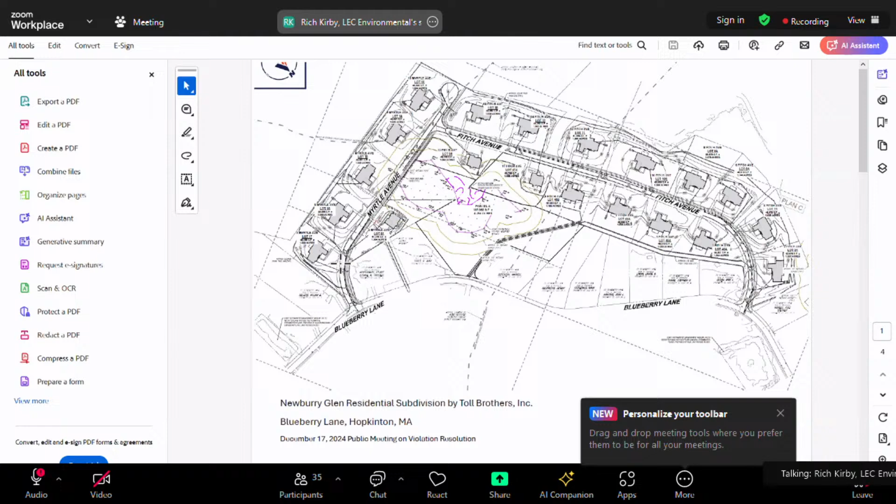The notice of violation, again, was dated December 13th, and it goes through some observations made by a commission member, namely sedimentation onto Fitch Avenue, the interior subdivision roadway, which made its way onto Blueberry Lane into the stormwater infrastructure and through down-gradient stormwater basins.

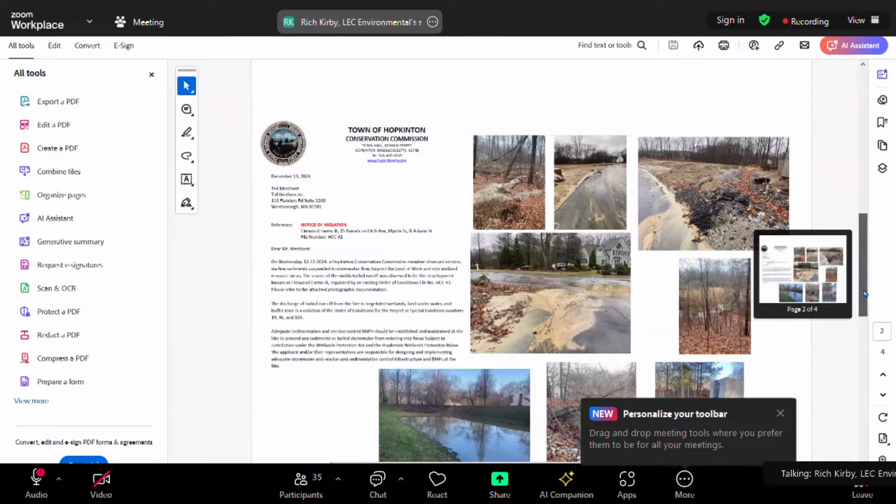Since then, Toll Brothers, Ted Merchant, myself, and the contractor from Fenton and Son met on site today, this afternoon, as soon as I heard about this, and got out to the site. Cleanup efforts have been underway.

Sediment was removed from Fitch Avenue and Blueberry Lane, and the contractor swept the pavement. The catch basin inlet protection was replaced and cleaned out along Fitch Avenue and Blueberry Lane. Basically they did their best to clean it up. You can see this bottom photo here - the pavement's pretty clean at this point. This catch basin, which is really the low point that received the lion's share of sediment, has all been replaced and cleaned out, and all the sediment around it has been cleaned out.

So we put our heads together and talked about what we could do as soon as possible. Ted made some calls and called in some favors, and fortunately we're able to get on this right away. S&M Farms is going to be installing compost sock and silt fence along roughly the northern half of both sides of Fitch Avenue. That's happening tomorrow. The whole point of that is to really limit the sediment transport from the open areas of the site onto the pavement, where it will then be directed to these catch basins.

We're going to reestablish a stormwater diversion swale with check dams and direct more surface runoff to the temporary basin as it was intended. Additional catch basin inlet protection along Blueberry Lane.

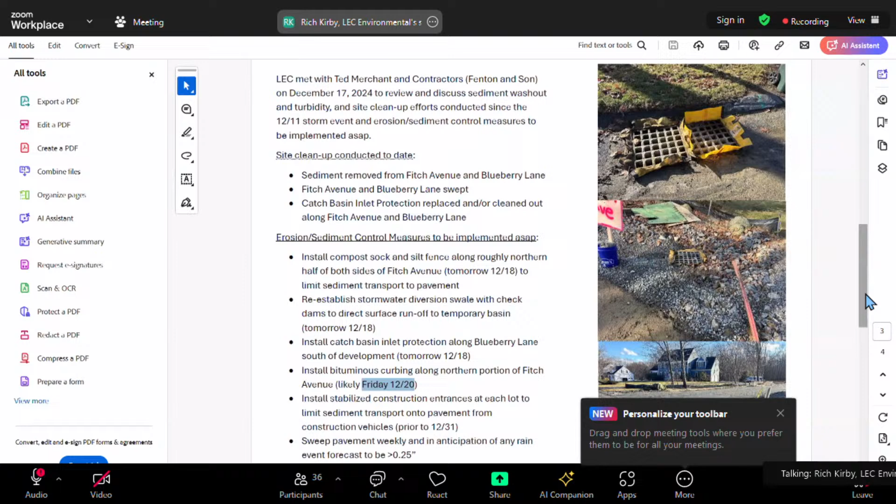So this fourth page includes a sketch of what we intend to do, starting tomorrow through the end of this week and the end of the year.

While the lion's share of the issue was down here at the northern end, we were told that there was some sedimentation observed at this end of Blueberry Lane as well. There is a down gradient catch basin that currently does not have protection, so we're going to install inlet protection here.

This is a note indicating the street sweeping, which will occur on a weekly basis, and of course, before a rain event greater than a quarter inch within 24 hours. These green lines represent where we're going to install the compost sock and entrenched silt fence on either side of Fitch Avenue. And we'll, of course, have stabilized construction entrances for each lot.

Ultimately, the goal is to have the siltation fence and compost sock block off entrances to the properties with the exception of the construction entrance, so vehicles are forced to utilize that stabilized construction entrance to limit sediment tracking onto the street.

We're also going to reestablish this temporary diversion swale, which will direct water to this existing temporary basin. As commission members may be aware, there's already a gravel swale along the perimeter of the property that flows into this catch basin right here at this corner. And then there's another perimeter drain installed over on this side and over here as well, I believe.

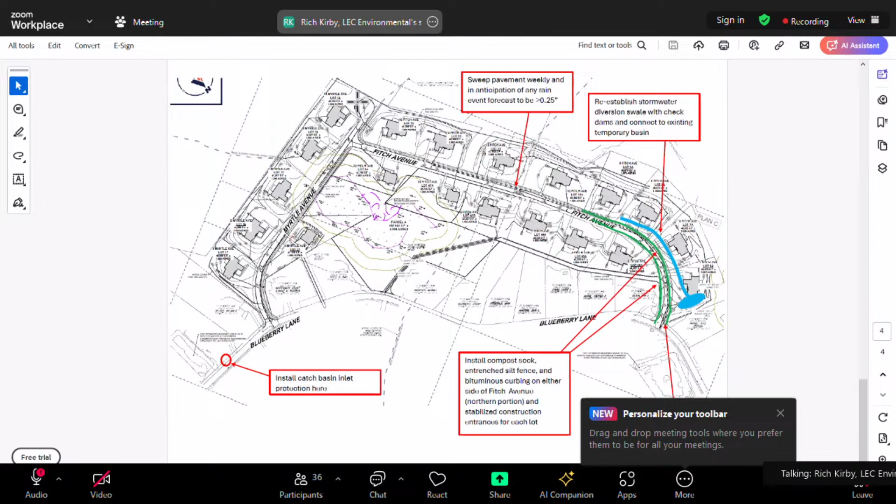So a good portion of the site has been cleared and grubbed as they anticipate rough grading and getting the foundations in. There are portions of the site, and Ted, correct me if I'm wrong, that have been cleared of vegetation but haven't been grubbed yet. So there's still sort of the ground cover duff in place to minimize runoff from those areas.

Yeah, that was going to be my point, Rich. The first 6 lots, as we come in, we have started to grade, and I think a lot of the pictures you saw reflected those 6 lots. But as you get further into the site, past the green line that's there, we haven't stripped the majority of that area outside of the right of way.

And I think the runoff in general from those areas is pretty minimal. For that reason, we've started construction, or started digging the first foundation on the first 6, and plan to start the remaining 5 here very shortly. So that's why those guys are cleared.

But the remaining ones, we haven't started full earthwork yet. And the goal is that once we get them temporarily graded, stripped and temporarily graded, there would be seed and straw placed down on them until such a time as we started construction on the home itself.

And so I would— oh, go ahead, Ted, sorry. For how long has there been just exposed dirt waiting for the foundations to go in? Has it been a week? Has it been a month?

They've been actively being worked on for, it's been a while off and on. I couldn't put a time frame on it, but they were on them less than 2 weeks ago, grading them up. I think it's just been lucky dry, so it hasn't been an issue. I would agree with that as well.

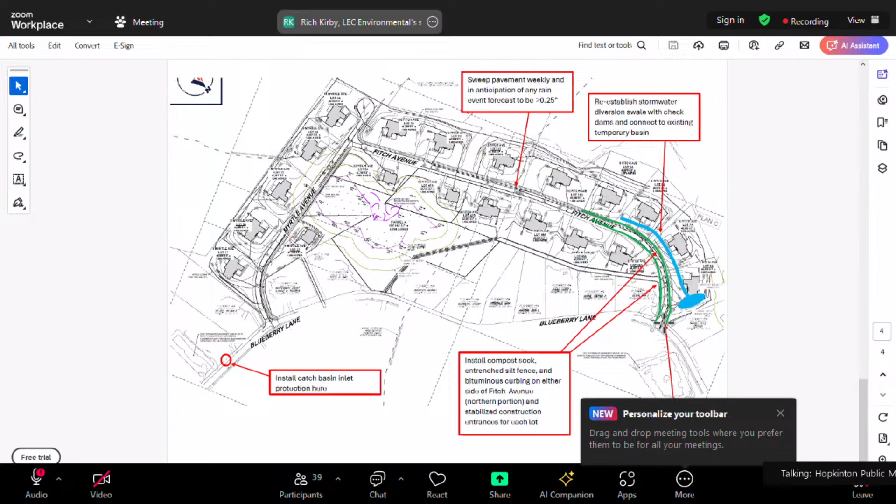Does anyone else on the commission have any questions, comments, or anyone from the public? Just looking for hands.

So at this point in time, I think it sounds like you have a good plan. If you could check in with Bowler, get those calcs, and just keep Judy and Anna updated on your work as it progresses over the next couple days so they can check it out. And Joe, that'd be great. I think that's all we need, unless I'm missing anything, Anna or Judy.

I think I feel comfortable with the response here at this point in time. Okay, we appreciate that, thank you, and we'll continue to keep you posted. Okay, thank you. All right. Thanks, have a good night. You too.

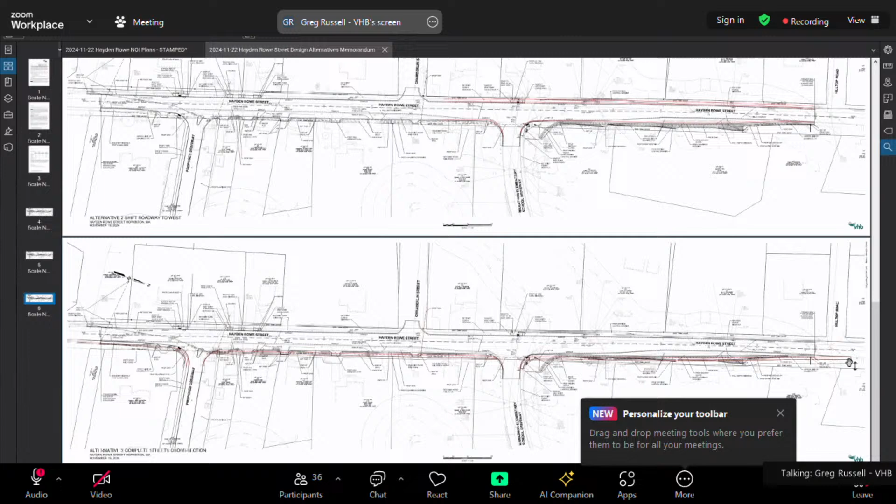As you can see in the red line here, this red line would be the curb line. So our curb line is the proposed curb line. It's about an extra 5 to 6 feet, so then we're entering direct wetland impacts, and again, rebuilding the head wall that's on the east side of the stream.

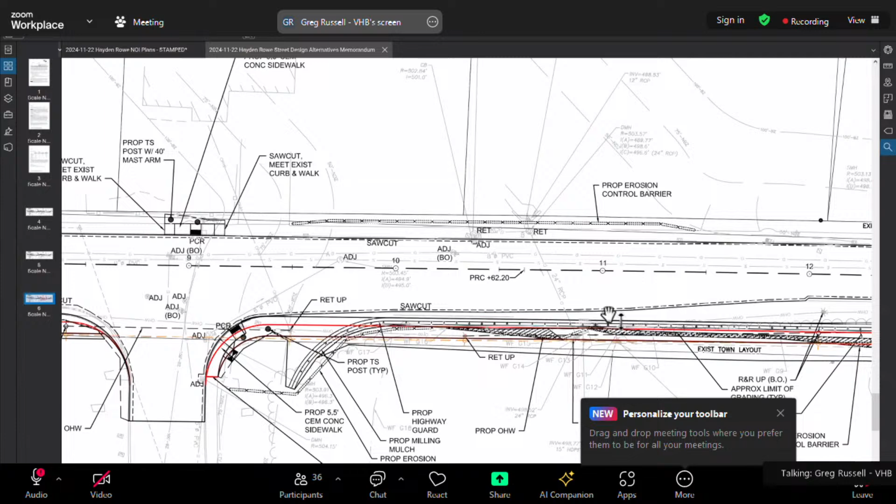Taking all those into consideration, we felt the initial alternative that we looked at provided the least amount of impacts to the wetland resource areas without opening up other issues that wouldn't be present otherwise. So with that, we moved forward with that alternative.

As Claire said, the project starts just to the south of the proposed Charleswood driveway and carries through, starts to widen out. The sidewalk coming out of the Charleswood School ties in and we provide a pedestrian crossing at the mouth, and then provide some widening to maintain that left turn lane and additional shoulder width moving up.

All this area is outside of any of the buffer zones. Then we come back, and tie into existing as we approach the Marathon School driveway. As we go through the driveway, we start getting into the buffer zones. There's no widening proposed other than for shoulders, for the first 100 feet or so.

Basically, because we're maintaining the existing cross section. Then we start to carry the left turn lane further to the north, which results in the additional widening along with the shoulders. In addition to that, we're providing guardrail along the east side until we start to taper back into the existing to the north by Hilltop.

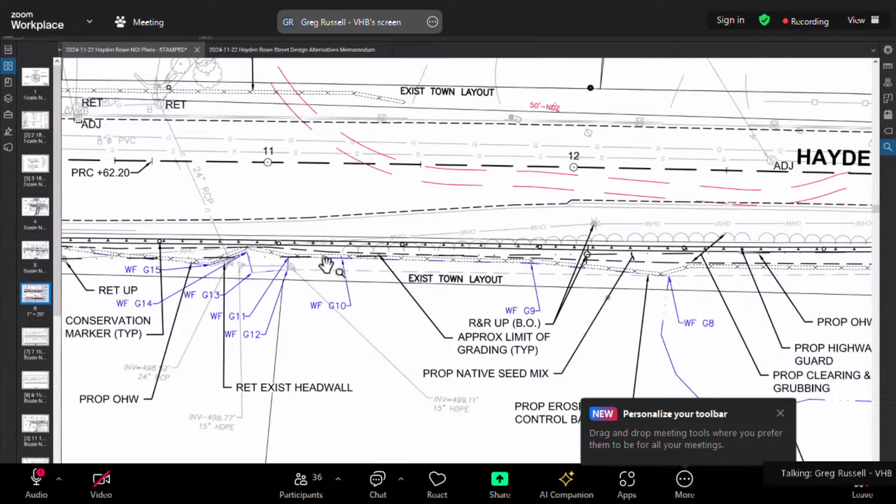So you can see here we have the limit of grading in this dark dashed line. Here's the culvert that we were discussing, so we're staying away from that. We provided conservation markers at regular intervals along the guardrail.

There are 2 utility poles that are getting moved back in the widening. The first 2 closest to the Marathon School driveway are staying in place. So then the widening continues. We extend the left turn lane approximately 250 feet to the north, and then it starts to taper back in.

This area here is the area with the knotweed that we're looking at. So most of the knotweed, or a good percentage of it, is going to be taken out as part of the widening, and that area will then be under a paved surface.

From grading, we have no direct impacts to the wetland area of the bordering vegetated wetland. We are putting in compost filter tubes along the entire limit of grading, or we've shown them here along the edge of the wetland, just so that we have space to remove additional knotweed and do the planting and seeding that Claire had mentioned.

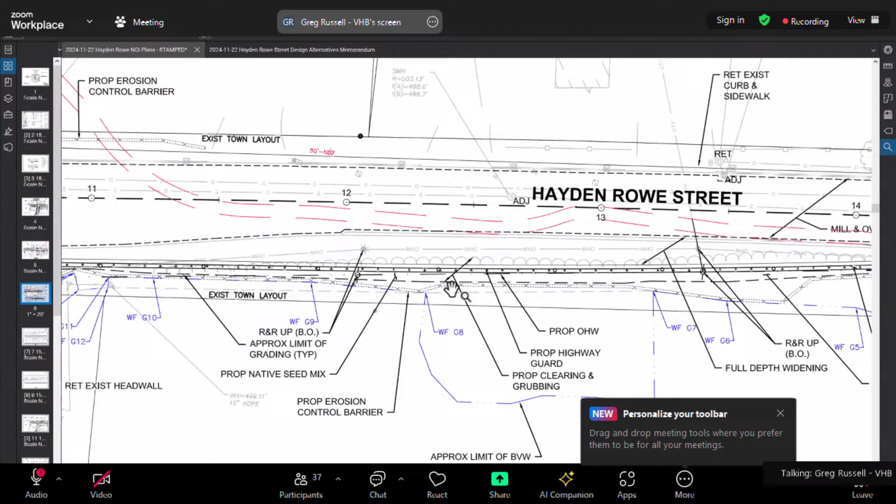That area will be graded down. We're not proposing - currently this whole area on the east side drains as country drainage. There's a bit of intermittent berm on that side which ends right around here, and then it just goes into straight country drainage and drains off the side directly into the wetland. So the intent is to maintain that flow pattern. However, it'll all just sheet flow off the edge.

We'll be replanting the slope, and wherever we take out the knotweed, we'll be putting in shrubs along with the native seed mix.

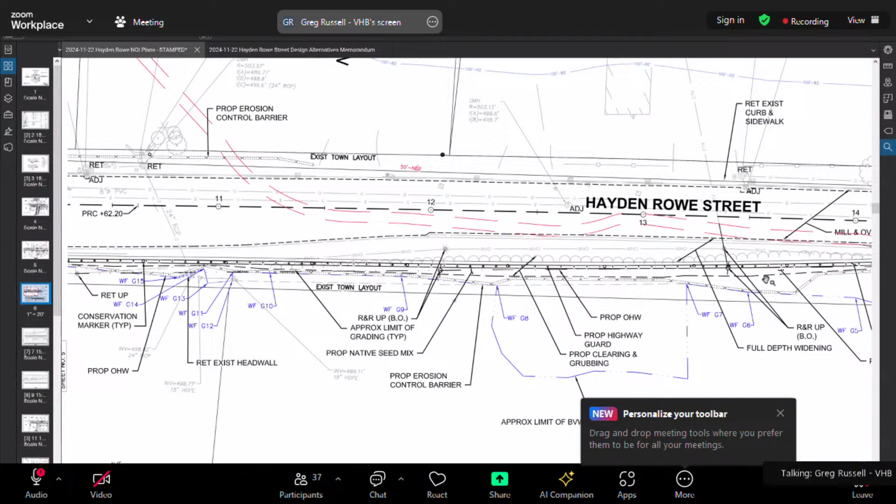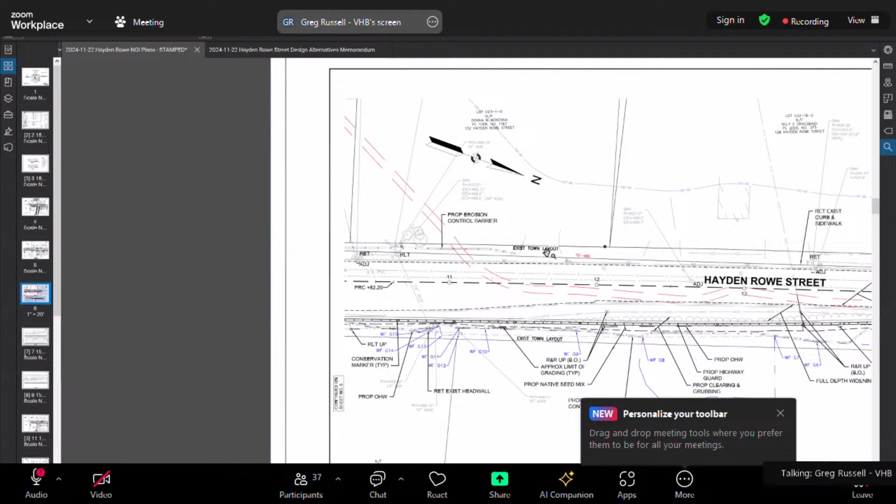The west side is all granite curb with concrete sidewalk. We're not proposing any work on that side within the buffer zone. We have put erosion controls starting within the public right of way, along the back of the existing head wall, which basically go from the first driveway to the north to the first driveway to the south, just to make sure that nothing from the roadway construction gets passed into that section of the river.

The intent is for the widening area to be full depth reconstruction. The rest of it will be mill and overlay. So there should be minimal modifications, either elevation wise or construction wise on the west side. So we've kept the erosion control to that limited area.

Down on this side, on the east side, we start the erosion control basically at the first catch basin down the Marathon driveway, and then carry it all along for the rest of the project limits.

Stormwater wise, there is an existing stormwater treatment unit on the Marathon driveway that discharges into a detention basin over on the north side of the driveway. There's a high point right around in this general area that kind of separates the north and south parts of the project. So pretty much all of this drainage either goes to this area which is crowned, so it either goes to the west and flows along the curb, or it comes down and gets into this catch basin and goes down. Anything to the north again flows directly into the wetland.

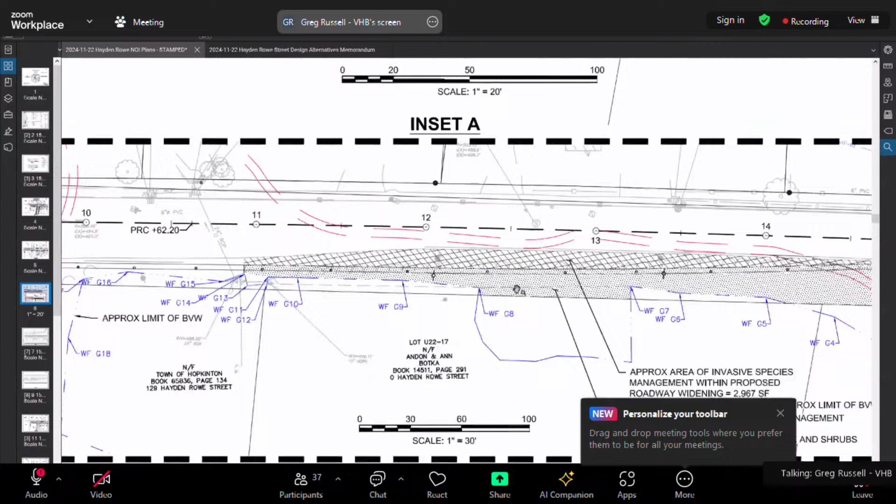This area with the dotted hatch here is the area that we're looking at for additional removal, and then we will add additional shrubs. Under the roadway, we're talking almost 3,000 square feet of knotweed that we'll be removing. Then this area outside of the right of way, but not in the wetlands - outside of the roadway, and in between the roadway and the wetlands - is approximately 6,600 square feet.

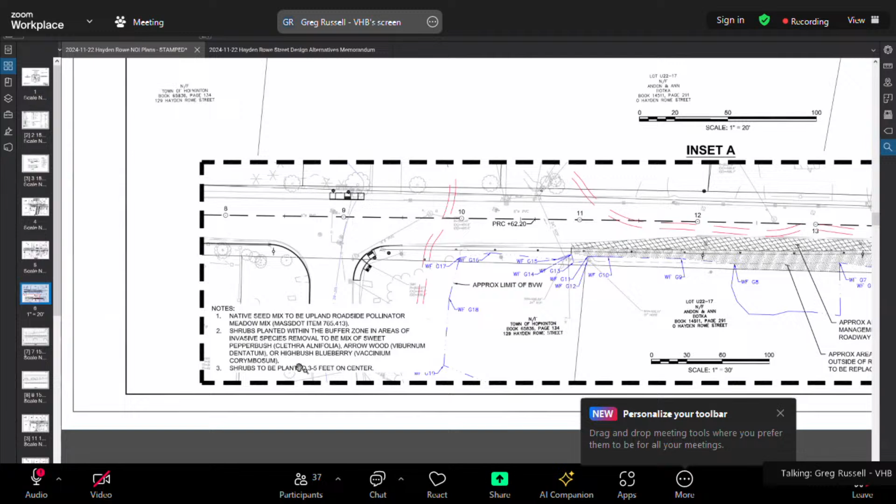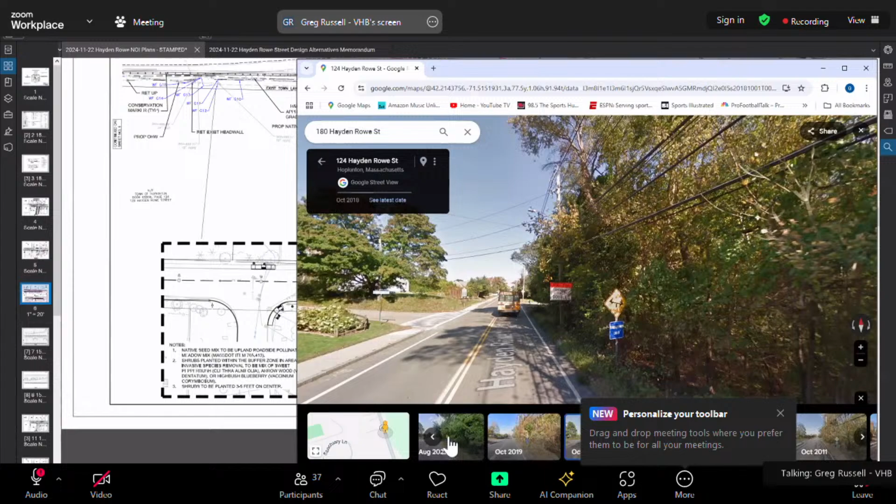The idea would be that we'd be replacing that with a native seed mix, and then shrubs such as high bush blueberry, arrowwood, pepperbush, or if there's something specific the commission would like, we could look into that as well. So that's kind of our plan for that area, and just so everyone knows, this is kind of what we're looking at.

It's kind of this stand of knotweed that runs straight down the edge of the road. There are obviously several kind of trees along this area. I know Joe pointed that out in his letter. I did go out and take a look today.

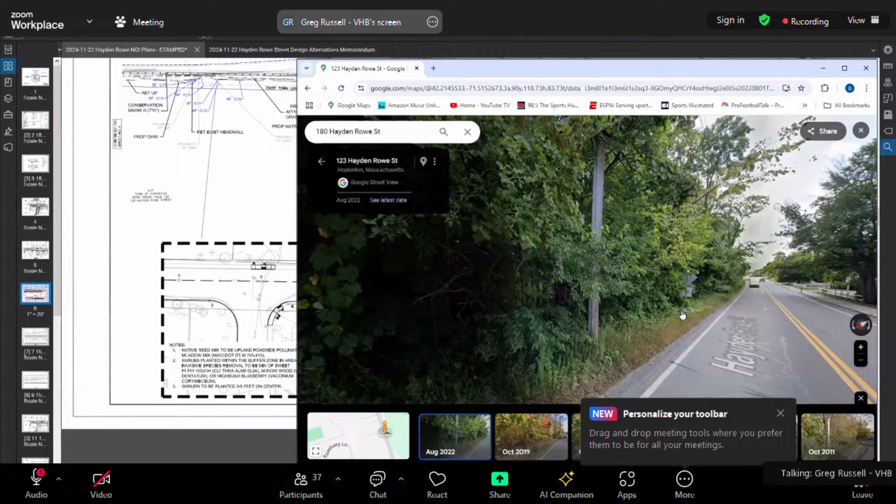So based on varying size, there's approximately 30 trees within that strip, anywhere between the wetland line and the backside of the utility poles. A lot of these trees, and so that number includes trees that are dead or dying, trees that have been creatively pruned by the utility companies.

There's several trees that either have the extremely tall trees with no branches other than at the top, and then we also have several trees that have been topped off, basically just cut right at the top. All varying sizes. So these are the trees that are kind of in that knotweed zone that we'd potentially be impacting.

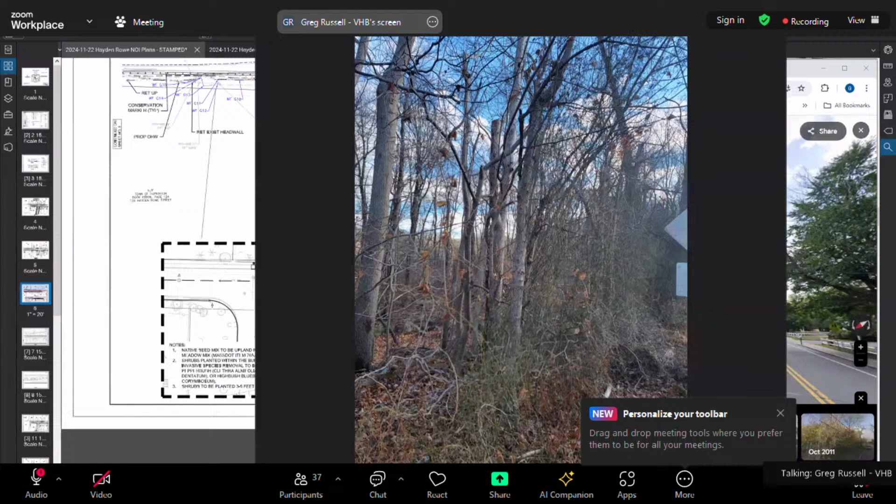These trees are more just past. These trees could potentially stay, if not, if we weren't going to take out the knotweed. They shouldn't be impacted by the utility lines. This is just south of the project limits.

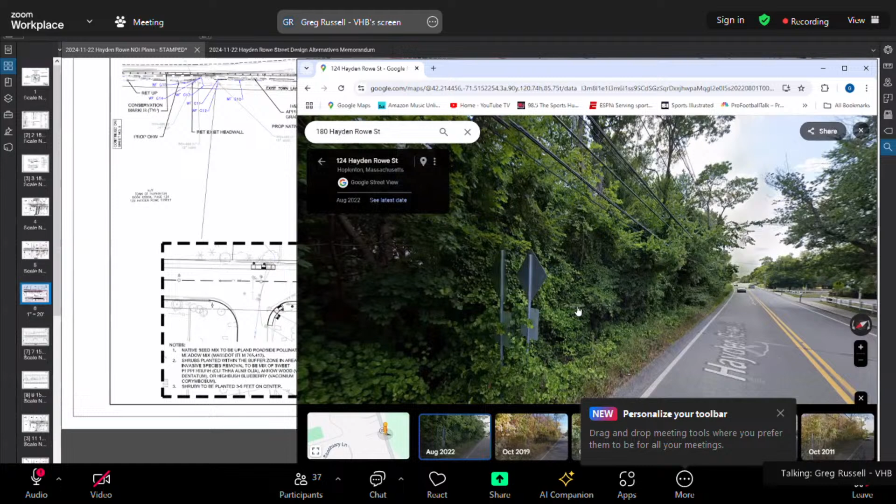So this is just a general kind of overview of what this area looks like, both today and in the growing season. So, with that, that's kind of the general project overview. We can turn it over to questions if anybody has any.

Great, thank you for that presentation and going through the design alternatives. I think that's helpful.

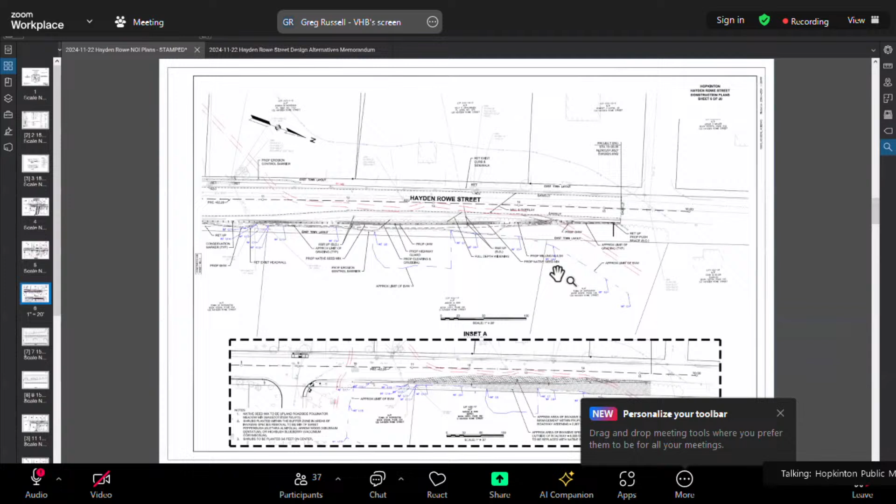The project seems fairly straightforward, and I know invasives are a huge issue right here along the street. We see them cut regularly anyway. I guess I want to ask Joe if he wants to go over any of his comments in particular to highlight from his review that you haven't already talked about. Greg, Joe, do you have anything you want to talk maybe about?

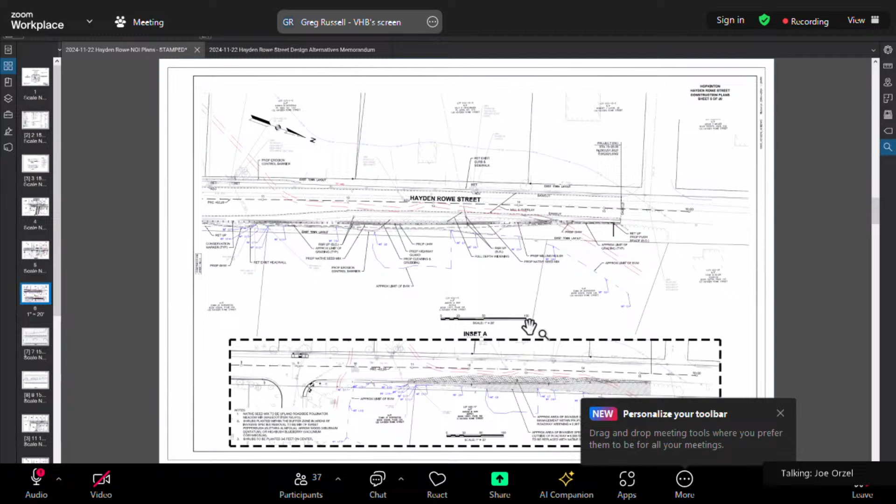Just touch on a couple of things. I did review the delineation and had no issues with the flagging except for one flag. C19 I thought was about 15 feet low, but it really doesn't impact the buffer zone at the proposed work. It's more or less along the entrance to the Marathon School.

And just wanted to also point out there is an isolated pocket of cattail and hydric soil close to the Marathon School driveway that appears that it was likely created with the stormwater management, stormwater outflow that was likely done at the time for the Marathon driveway was put in. So I would assume that that is not a jurisdictional wetland if it was in fact created at that time. And I would just want verification that that is the case, that it was created at the time that stormwater drainage went in along the driveway there.

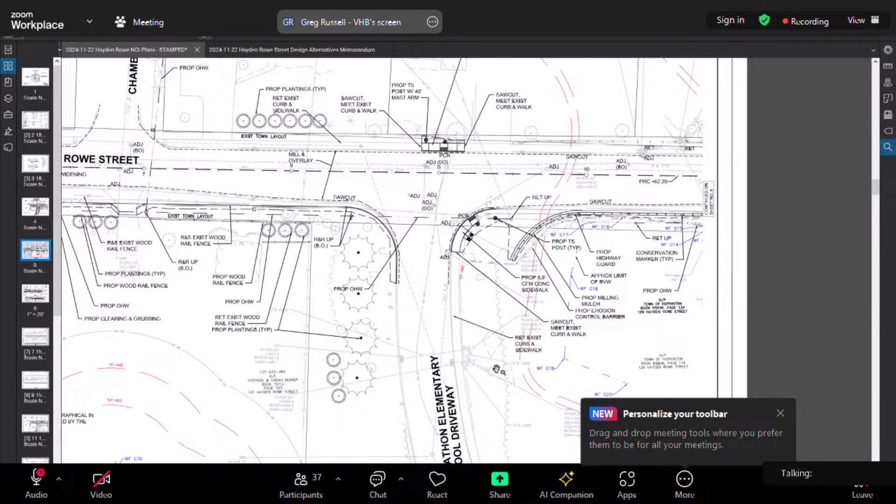Also, just wanted to request, I believe that the work meets the limited project requirements. I just wanted to confirm, have the applicant confirm that what is being proposed does meet the requirement for widening of less than a single lane. It's not defined in the regulation exactly what a single lane width is, but maybe if that can be addressed, that would be helpful.

It was touched on as far as the trees that are being removed. I did review the invasive species management plan, and that is a significant stand of knotweed that would be very beneficial to have removed and managed and minimized. So I am in favor of that.

I felt that the waiver request and the alternatives, the scope of the alternatives was appropriate. And just wanted to also note, with respect to the stream that flows through the site, I think all the indications, stream stats, mapping, show the stream to be intermittent.

It is also mapped by USGS as the Charles River. So even the segment that comes up through the project site, if you go onto the USGS national map, you can pull up the national hydrography data set, and you can click on any stream segment and it'll give you some additional information. So USGS considers this stream segment that comes up through the site as the Charles River.

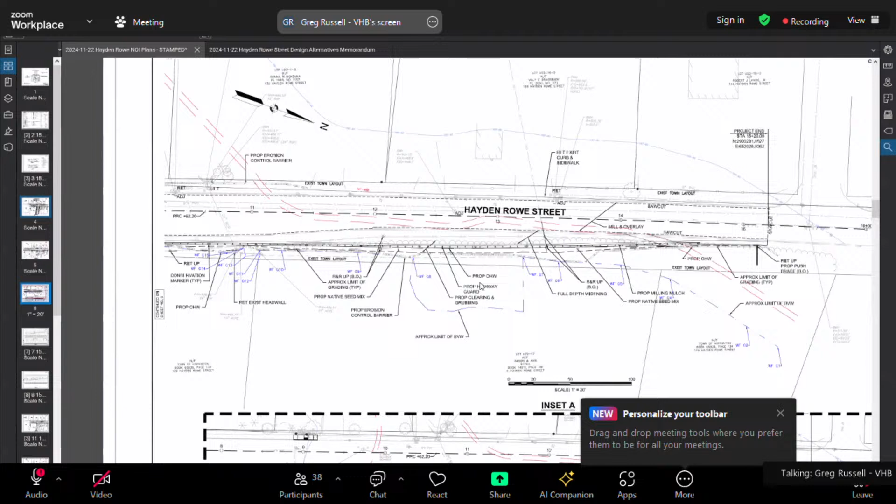As for the knotweed, there's obviously no guarantees that if some is left, it won't expand back out. That being said, we're basically removing its favorite environment as part of this. So the goal is to remove it, replant with native species to provide a buffer to keep it from pushing back through. That's kind of how it'll have to be maintained in that area, to keep it from trying to escape that area. But that's kind of the goal.

I'd have to go back and check whether we have it in the invasive species management plan, how to get rid of it. But I'd have to go back and double check that.

Yep, Greg, I can touch on that a bit. We provided an invasive species management plan in our notice of intent application. It's relatively brief, but similar to Marathon Elementary School next door, this project will be bid out to a contractor who will be required to provide a site-specific ISMP and include that in their bid package. So we have some general outlines that any contractors will have to follow when preparing that for the bid package, and it'll really be up to the general contractor to ensure they're utilizing best construction management practices to keep soil and excavated materials from where the Japanese knotweed is present separate from anything else on site, dispose of it properly so it's not mixed in with any other soils going to appropriate sites, and that it would be disposed of properly. So generally we have an overview and outline of what we'd be expecting, but it will be up to the general contractor, and the applicant is open to providing that final plan to the commission prior to the start of construction.

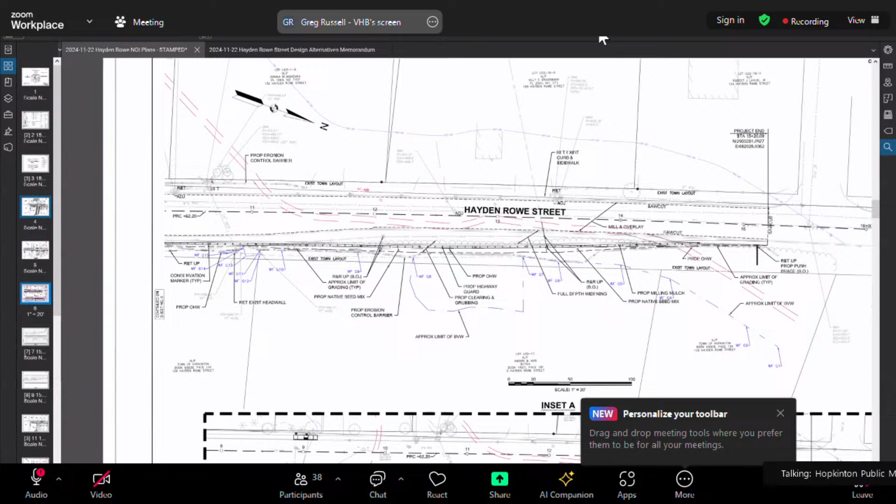All right, next up we have 218 Wood Street, notice of intent for a septic system.

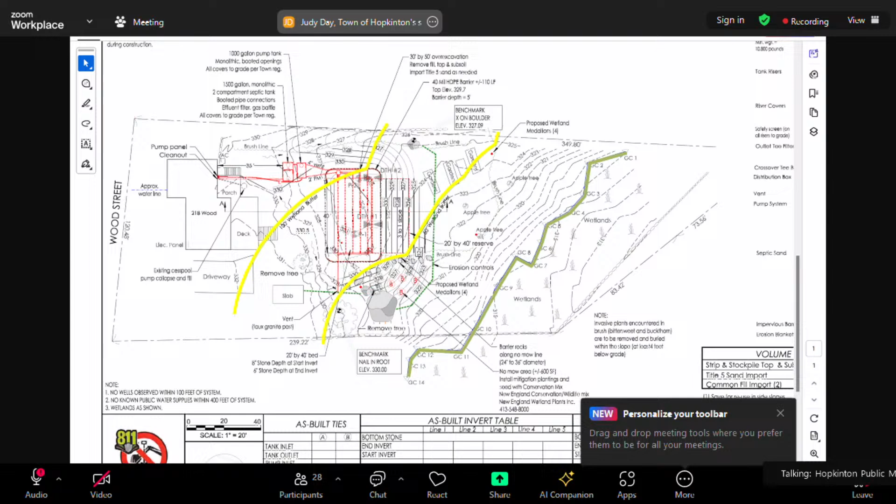All right, next up we have 9 School Street, request for determination of applicability, another septic system. Again, Dan McIntyre representing the homeowner.

Through the chair, yes, can we just read the legal ad for this one please? Did you send it to me? It was all in one PDF, all 5 of them. Oh okay, sorry, scroll down. Gotcha, thank you.

All right. The Hopkinton Conservation Commission will hold a public hearing on Tuesday, December 17th, 2024 at 7 p.m. virtually online to hear all persons interested in a request for determination of applicability filed by Lai Feng Chen to replace a failed septic system with associated site work. Location 9 School Street, Assessor's Map R22, Block 12, Lot E.

Go ahead, continue. This is a replacement of a failed septic system. It did not pass a Title V inspection when the home sold. The new homeowner is putting in a new septic system.

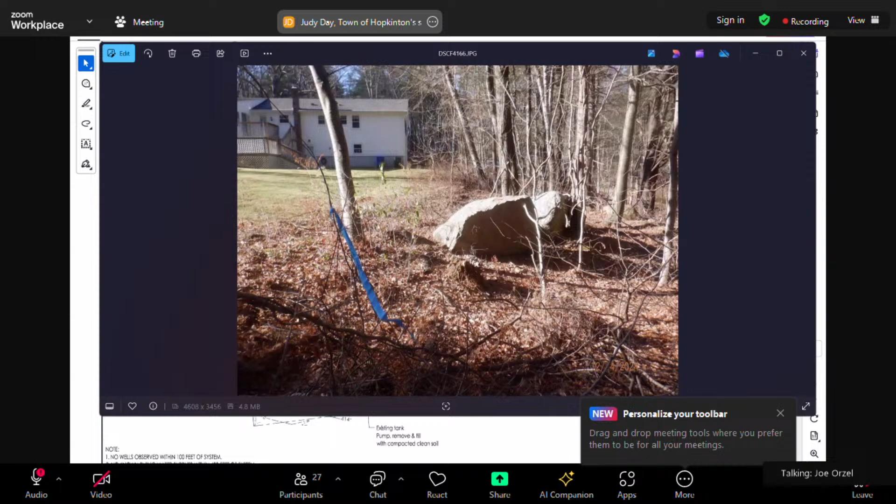Okay, right there - so that's about the edge of hydric soil, and then the wetland line more or less continues toward the trees and the shrub line from there. My concern was whether the wetland edge created a 50-foot buffer that would put the work within 50 feet, but it looks like that is not the case based on field measurements. That is about where I'd say the edge of the hydric soil extends to the line, and at that location it would actually curve more or less parallel with School Street toward the viewer in that photo.

Apologies for asking people to repeat, but I couldn't hear what was going on. I think I understood Matt and Melissa to say maybe we just ought to put PIBs on the existing tree line, but that would be putting PIBs in the wetland, wouldn't it? No, not in this case - the tree line would be just near the edge of the wetland.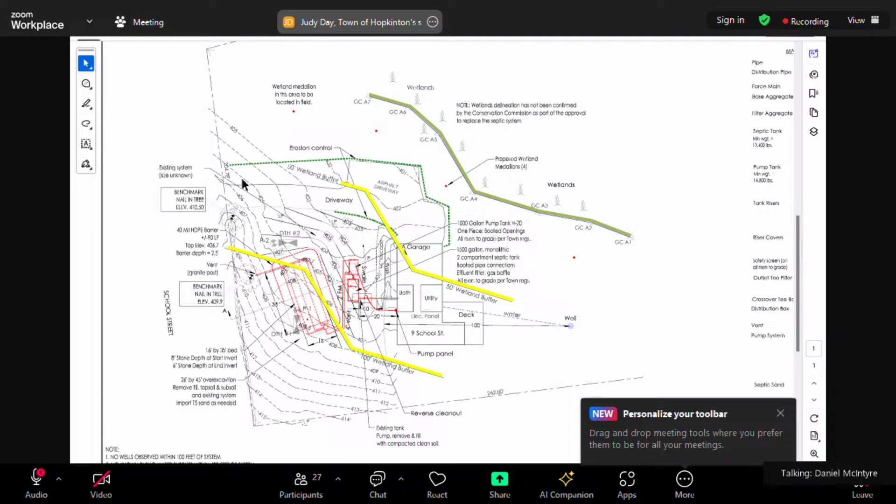All right, next up we have 1 Teresa Road. This is another request for determination of applicability for an addition. And yes, I will read it.

All right, the Hopkinton Conservation Commission will hold a public hearing on Tuesday, December 17th, 2024 at 7 p.m. virtually online to hear all persons interested in a request for determination of applicability filed by Raymond and Julie Fryer, to construct an addition with associated site work. Location 1 Teresa Road, Assessor's Map U24, Block 101, Lot 0.

So, do we have Anna? Were you going to go, or Judy, go through this one, or do we have someone on the line, homeowner or otherwise, to present the project? I believe the applicant is on the line. Okay. Yeah, Ray Fryer, 1 Teresa Road, homeowner.

Hi, Ray. Yes, what we are proposing is an addition to our house, sort of three parts there. We're looking to add a second story over our current 2-car garage. We're looking to add a carport over on the, I guess that's kind of the northern side, a single car carport.

Oh, Melissa, do I remember correctly that there was once to be a rain garden here, over on the southern portion of the property, where there was an NOI? Or am I making that up? Are you thinking of the Hughes property right next to it? No, no, no, this property. I don't remember this.

It would have been several years ago. Yeah, we've owned it since 2005. Okay, as so far as I know, never had proposed a rain garden or some type of water feature on the southerly portion? No. Okay, it must be another place I'm thinking of. Through the chair, I don't have any. Thank you.

Anything from NOIs on this property in our records? Okay, so no map. Not that we have on file anyway. I only ask because we've got a black iron fence going through the wetland, and looking at some of the historic aerials of the property, this wasn't always lawn. Mm-hmm, so I understand what we're here for to look at - it's the proposed building addition and the carport, and that's a portion that's in jurisdiction.

But if we're going to go down the path of discussing PIBs and potentially moving drain discharge lines, if we're going to take a holistic look at this, we should take a holistic look at it. It's a slippery slope. Yeah. The black iron fence - I'm torn on which way, as a commission, we should be looking at this particular proposal.

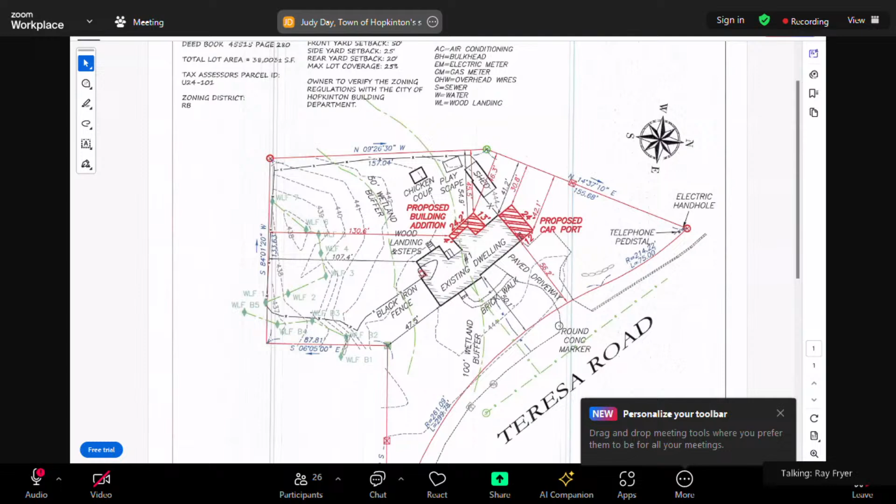All right. Our last new hearing for the night, Wall Street Development, 12 North Mill Street, Notice of Intent. Let me read. Okay, the Hopkinton Conservation Commission will hold a public hearing on Tuesday, December 17th, 2024 at 7 p.m. virtually online to hear all persons interested in a notice of intent filed by Wall Street Development Corp for temporary access for soil testing. Location 12 North Mill Street, Assessor's Map R19, Block 23, Lot E.

Mr. Petrozzi, are you still with us? Oh my God, yes, I just woke up. Okay, good.

You're on. All right, so basically this is a lot that we've had for quite some time, probably 25 years or so. It predates the adoption of the wetland bylaw. We're in the process of retesting for septic system soil testing in the rear portion of the lot. It was done back in 1995 or 93, but based on the Title V regulations, it's required to be tested again.

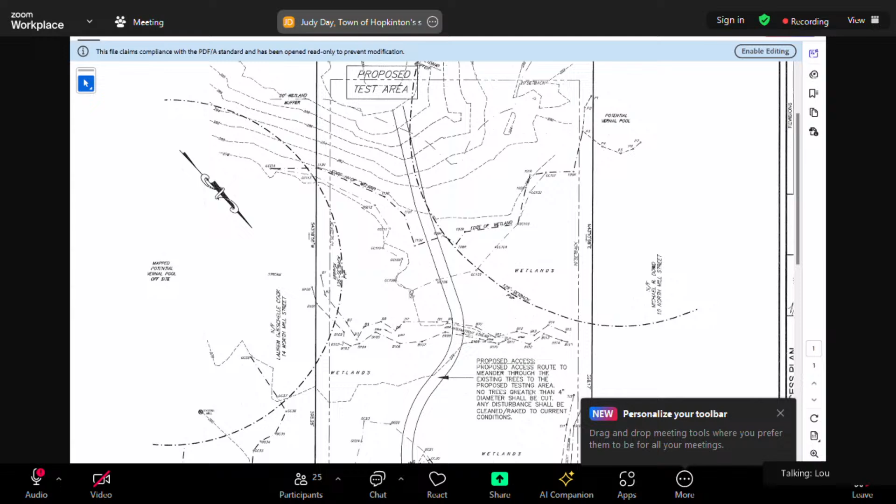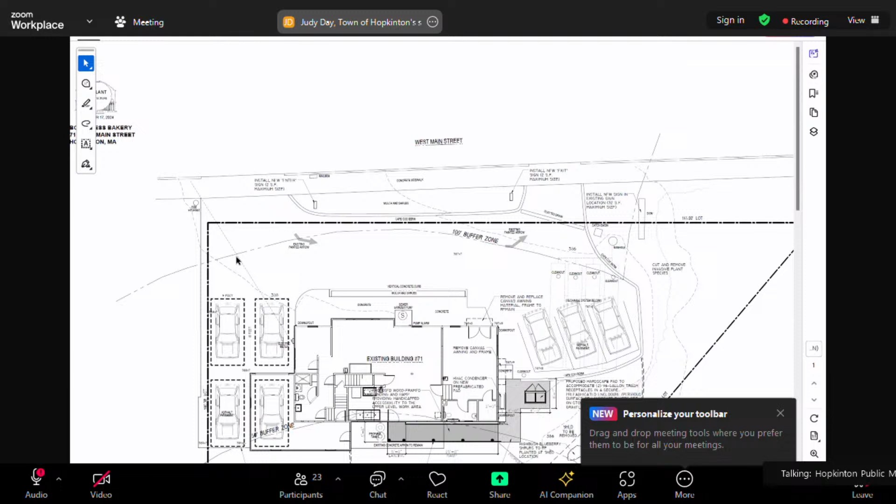Next up, continued hearing, 71 West Main Street, request for determination of applicability. I believe we have some updated plans to take a look at. And is the applicant or the representative on the call?

Jay? Hi, I'm here, Jay Gallant, applicant's representative. I'm the architect for the project. Great, welcome back. Do you want to give an update on the changes you've made?

Yes, so we have moved, or located the trash receptacles, which you can see to the east or right of the building and directly behind the parking area, outside the 50-foot buffer zone. We were considering a location within the 50-foot buffer zone before, which was not good. This is better in a lot of ways.

As you can see, we're proposing some native plantings in the location of the existing shed, which we're proposing to remove. And those are the updates to the plan. Oh, the third update is the HVAC condenser, which is proposed to be right next to the building between the walkway and the building itself, not within the 50-foot buffer.

Okay. Yep, this is looking better. Thank you.

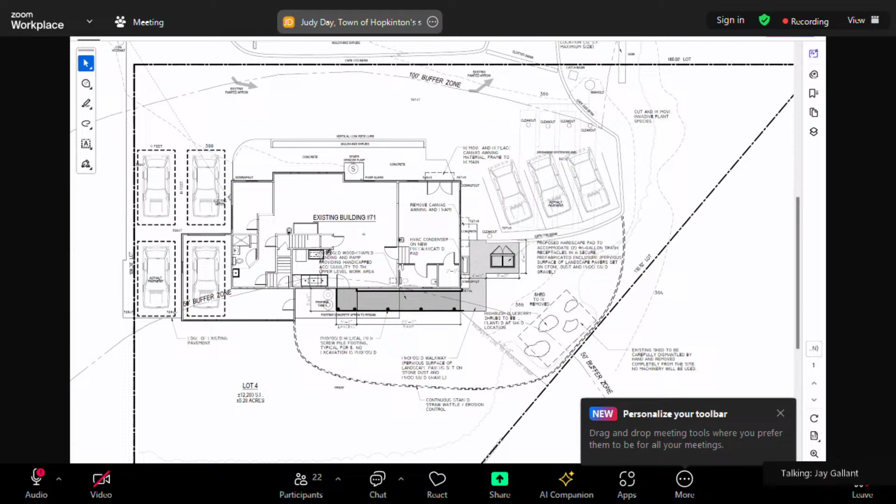So is that four blueberries you're showing in the shed location? Correct. So it's not very clearly shown, but the existing shrubs that are there kind of go right up to the shed. You can sort of see, I dashed, I kind of ghosted in the line, and so the assumption is that they'll sort of fill that in.

Okay, and then you have a note up there about the invasives, which was the other thing we touched on at the last meeting. Correct. So we put together an invasive species management plan, where basically we want to go through and identify with our landscape contractor, if that's acceptable, the invasive species and remove them. That's our plan.

Okay, I'm just reading it, I don't think I saw this yet. Joe, did you by chance take a look at this? I know it came in today. I did have a chance to look at this. You did? Okay. What do you think?

I think the only suggestion that I might include with the invasive species management plan is that step number 4, where they're going to cut the knotweed and then cover it with plastic - maybe prior to covering it, they initially paint the stems with some herbicide. I know there's discussion of herbicide use for a follow-up treatment, but it might be good to treat those stems initially when the plants are cut. Depending on time of year, but if it's the appropriate time of year, that'd be beneficial.

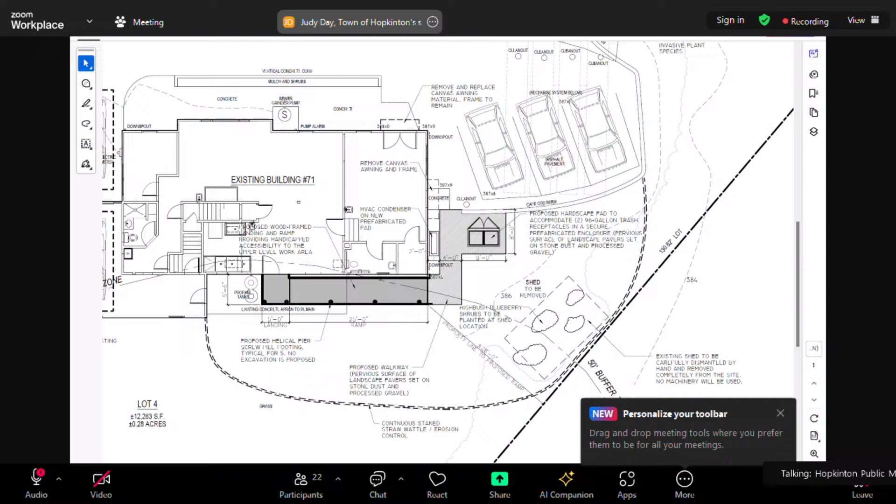Thank you. All right. Good luck. Thanks. Come back anytime. All right.

All right, back to the work session items. The Trails at Legacy Farms request for additional units to be released from the cease and desist.

Mr. Bemis, you, I believe, are on the line now. Yes, thank you. Good evening. Good, I know Mr. Gately was in attendance earlier. I'm not sure if he's still here, but I can speak to this. I know initially he had requested the release of 10 units, but Peter, why don't I take over that, please? Oh, go ahead, Ben.

Yeah, sorry. At the end of November, I sent a request to Anna and Judy for our second release of foundations. We had 10 released in July. They've all been installed. Most of them are framed and proceeding with construction. These 10 now have been done since about the middle of November.

So I sent a request for another 10 units to be released. And today I amended it to 3 units, and sent a revised schedule to Anna for the meeting tonight, just to lay out all the remaining work left, the remaining site work, infrastructure, and foundations. As part of that submittal today, I also put a site plan in there that keyed in sequence the remaining, what I'm calling 8 releases, starting with the 3 that we would like approved for release tonight.

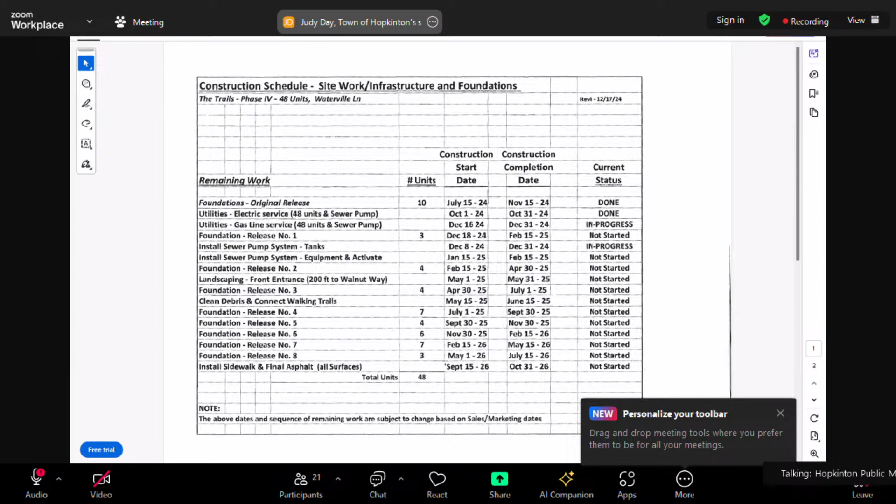We can pull up the letter. We did submit a COC, but you're right, it did come in today, for the 2 off-site areas. One is Ashland based and the other is Hopkinton based, but those were submitted to each community. The work has been done. We really wanted to go through one heavy rainstorm with it to make sure everything was good, and we got that on Wednesday. So we were able to confirm everything, see everything was stable, and we prepared our as-built and submitted it.

That's appreciated. I think for tonight, we're not going to be able to make a decision on releasing lots, we need to review this information for ourselves. We need to do that. I think that's all I have on this agenda item, so we can move to the next one if you like, regarding the violation discussion.

Could I just ask you if you have everything now? I don't know, because I just got it this afternoon. So you just got the new schedule this afternoon. I'm just looking at the other items, and just to be clear on what it is - I think everything's been submitted. So if I understand, it's really just the construction schedule that needs to be reviewed.

Yes, the SWPPP reports and everything else have been submitted. And did we get the SWPPP reports? A few of them were a little bit late, and we have not gotten one from the storm from last Wednesday, as far as I'm aware, which would be great to have as a requirement through the cease and desist.

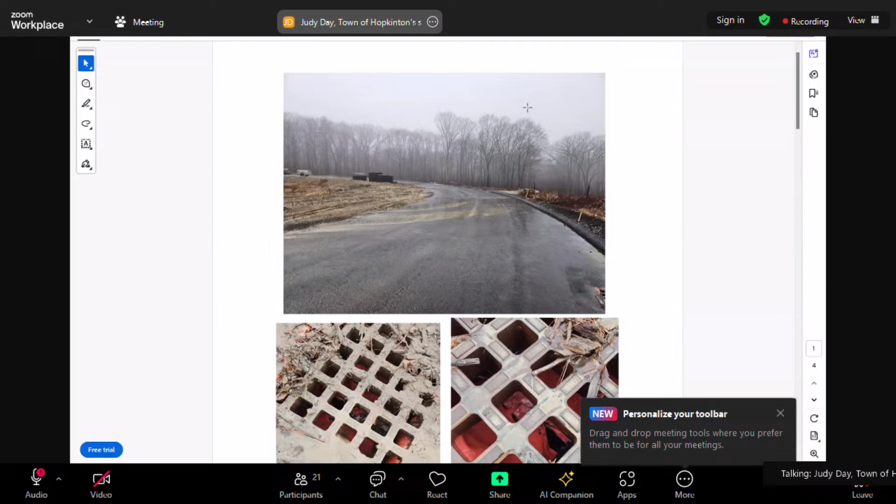Yes, so last Wednesday I went out on site during the storm and observed sediment tracking beyond the limit of work past the silt fence, in the basin behind phase 4. Let me pull up my pictures. So sediment was pressing up against the silt fence behind the overflow behind the basin at phase 4, as well as a significant amount of sediment coming off of the unstabilized areas around the roadway for phase 4, flowing into catch basins, which unfortunately had silt sacks with holes in them. So these were going straight into the basin, which was pretty laden with sediment at the time. I spoke with Peter and asked for the silt sacks to be repaired, which I believe he was going to do. There was also some dewatering of the basin going on into a dirt bag to try to get some of that sediment out of the water coming off of the overflow area.

I believe Ashland is on the call. They've also issued a notice of violation, as they saw sediment entering the reservoir across the street. Okay.

All right, so being that - Becca, I see you. Hello, thank you for coming and sticking around, it's a late night. So I'd like to just give you an opportunity if you want to speak about what you've seen and want to share with our commission tonight.

Sure, can you guys hear me okay? Yes. All right, I'll just clarify, we did not issue a new notice of violation. We still have our previous existing enforcement order, which is still in effect. I think we actually have 2 on different parts of the project. During that storm event, we did see sediment entering the wetlands down on Howe/Wilson Street over there, coming down from the various parts of the property.

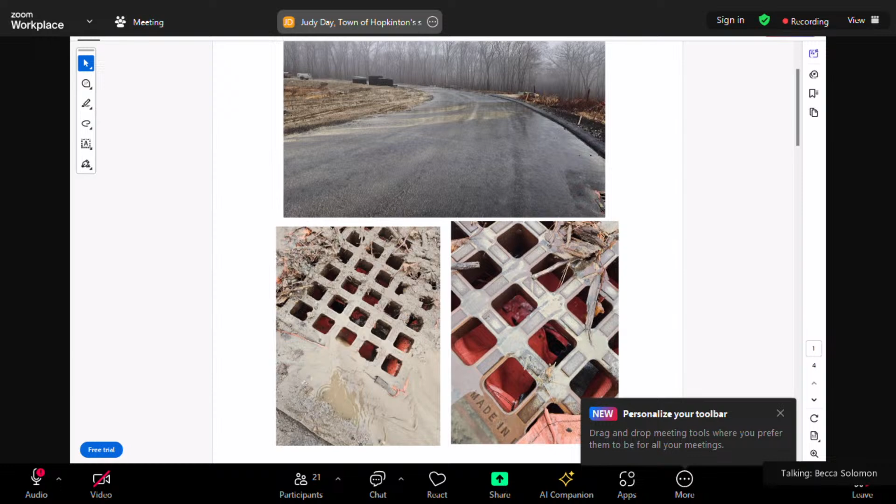Okay, I did see at the bottom of the phase 4 basin, I think those are the photos there where the 3 rows of silt fence are. I think I was there a little bit after you guys, and it was overtopping those at that point and bringing sediment-laden water down the trail there and towards the Ashland side.

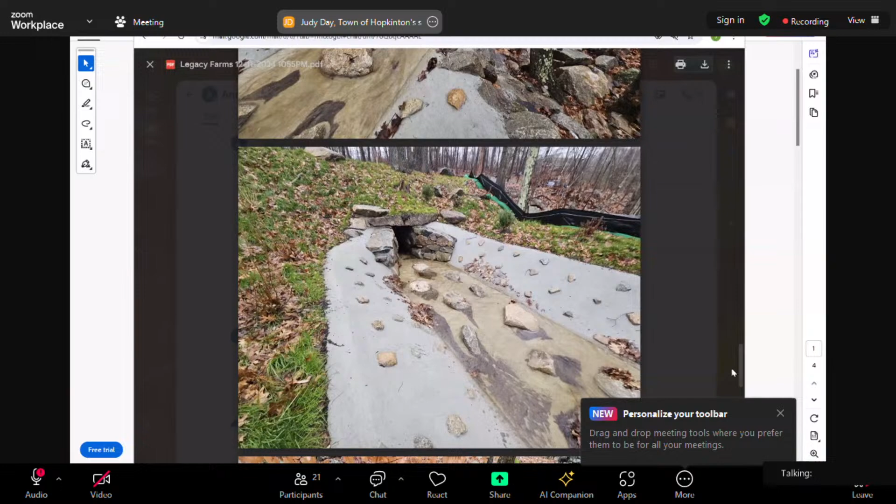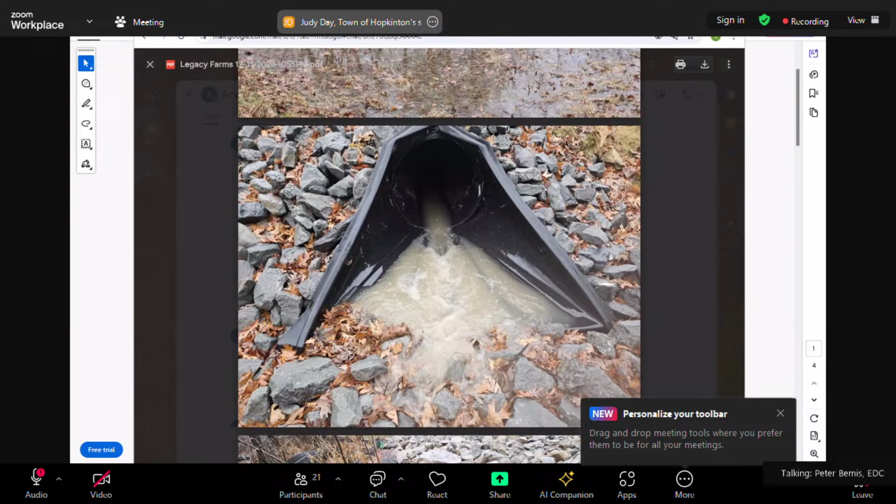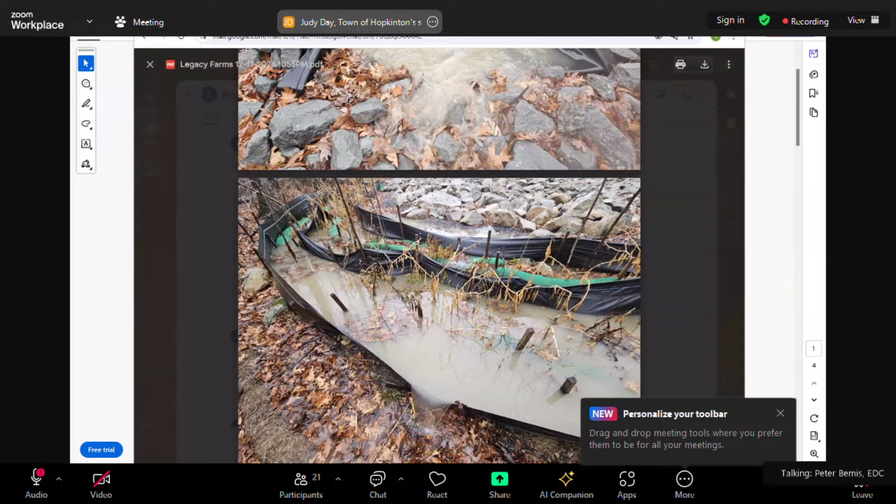I would like to speak to those photos before we move on, because they imply that's sediment from our project, but it is not. The water in the channel we constructed where the old corrugated pipe was is clear water. The sediment you see in the reservoir is a result of the sediment at the base of the reservoir being exposed, because there's about 50 feet of shoreline exposed. That's why that sediment was in the pond in that first picture.

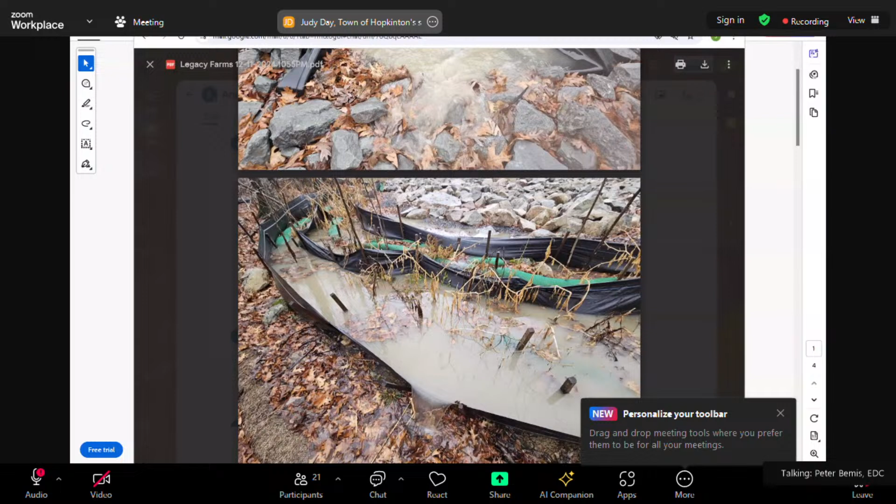That had nothing to do with sediment coming from the site. That sediment, by the time it reached the wetland, had an NTU of about 80, and the NTU on base flow in the main channel was 20. I don't disagree, it was over 50 — I said to Judy that's exactly what we got for the readings. I fully agree, but by the time that water mixed with all the other water, it was clear in the main channel that went into the reservoir.

Unfortunately, the reservoir has about 50 feet of flat shoreline, and that flat shoreline has to receive water coming from our project, plus all of Wilson Street, Howe Street, and the watershed up above to Legacy Farms North. That's a lot of water, and it's causing rivulets and channels to cut into the shoreline. That's why that sediment was in the pond, not because of our project. I want that clarified, because we tied into the existing sluiceway — we did not change the sluiceway that entered the water body of the reservoir.

Okay, thank you. And these observations are things that will be in your SWPPP report that we haven't received yet, correct? Right.

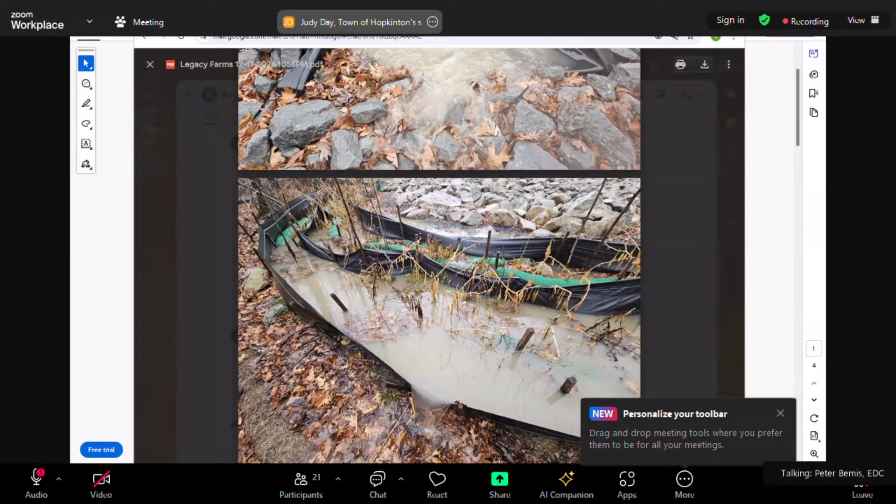We did find the source of the problem and eradicated it immediately. Had it not been for the shoulders of the road not being properly treated and having ruts in them, which shouldn't have been there but were, that caused the transport into the road. So Judy's right about her assessment on where the sediment came from, and it's been addressed. There's stone around the road as there should have been, the site is well stabilized, and the problem in the basin has been eliminated — we're back to a closed basin.

Okay. Judy, do you have anything else to add, or Becca?

Through the chair, I'm not in a position to say where the sediment in the reservoir came from, but I did see it coming off the overflow silty and going down that gradient behind the property. So those were just my observations. Yep, no matter what the source is, we don't want sediment going into the reservoir. Agreed — I think a lot of times there are multiple prongs to these things that happen, but we still need to figure it out.

Okay, so, all right. At this point in time, you've put measures in place — do you have more to do? How do you feel about the site?

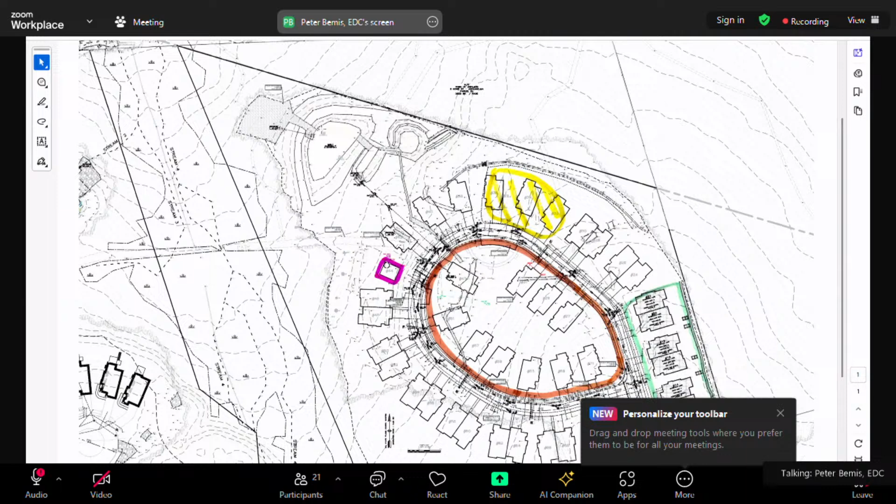So back during the summer and fall, we didn't have a lot of rain, but when we did have rain, it was functioning properly. With the storm coming, we anticipated it would still continue to perform properly, but it did not. So we shut it down, and now we're back to a holding cell. We're going to hold all the storm water during storm events and then just release it slowly through filtered bags. That's what we were doing before, until we can have the ground completely stabilized.

So the picture that Judy showed you, she showed you this culvert. She showed you this silt fence here. When we did our soil test, or our water test if you will, that was at this location here. That's where we had the 80 NTU.

And this main channel here is where we had basically 20, which is this background that comes from Legacy Farms North. And when I was testing it in this channel, it was clearer than this because it's actually getting added water from other sources.

The film of sediment that you could see there was in this area, and it was from all of this water digging up the shoreline and carrying it out into the reservoir itself. It is not the water coming from this basin contributing to here. So I just want to make sure that's factually correct, that that's what was happening. It was not our site.

So, okay, so it was 80 coming out of your site and then it got diluted. You had the benefit of dilution. Not disagreeing with that.

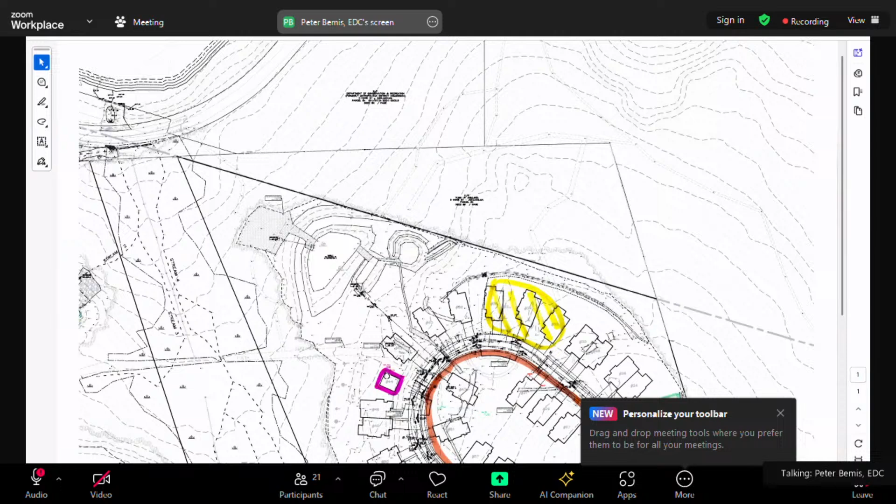I can try to bring up that other picture if it'll come up. I'm not sure, can you see that? It didn't change. No, it didn't change. All right, I'm going to stop the share and go back and do it one more time, just so you can see what we did along the road edge.

I'm not sure why it doesn't let you do that, but this shoulder is what was in Judy's picture. The water coming down this slope was washing through here, and there were ruts from construction vehicles having gone off the road when the shoulder was soft after the thaw period. That's what was causing the water to migrate back out into the pavement. Now that the stone's here, if a construction vehicle drives off the edge, it's not going to do that.

Okay, that looks like it's going to be helpful. Less likely to do that, I should say. No, that looks helpful. So we're trying to respond. We'd like to respond ahead of time to second guess what might happen, but as soon as we see something happening, we are responsive to it.

We were there during the event, and we did stop that as quickly as we could when we saw what was happening. Okay, thank you, that's appreciated. It was a big storm. So we need to definitely be all hands on deck when those come up, especially after drought periods. I think it makes it worse. Right, the sediment.

Any thoughts or questions from commission members that you'd like to share? This is Ed, the chair. And this is just a continuation: everything seems to be after the fact, and we can't seemingly ever get ahead of it. It's disheartening, at the very least.

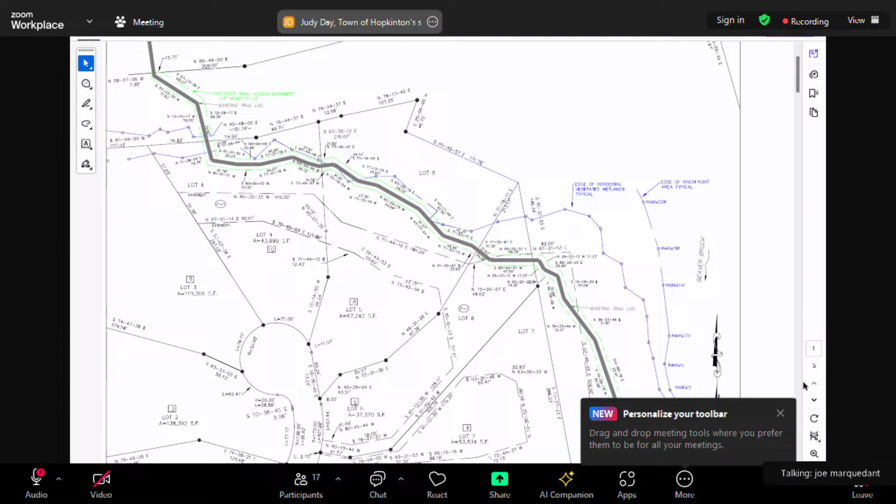Judy, you want to advance that a little bit, or you want me to share my screen? Yeah, happy to—that's the sheet I'm thinking of. Okay, oh, there we go. So for orientation, this is Hayden Rowe Street, and this is Emerald Drive that leads up into the subdivision. All the homes are out in here.

What we have proposed originally was a 10-foot wide walk from the intersection with Emerald Drive and Hayden Rowe Street, in about 500 feet. Then we were to cross Emerald Drive and meander southeasterly across that existing field to reach other land of the town of Hopkinton. That was going to be the trail network that led folks through what was the Dwinell Farm over to College Street and College Rock.

There has been a shift, I think, in focus with the Trails Committee and town meeting. The idea that we would meet a trail constructed along Hayden Rowe Street has gone by the boards. There is very little interest, given the rate of traffic, the speed of traffic, and the infrastructure necessary to get folks from other spots like Granite Street, other potential trailheads, to this spot.

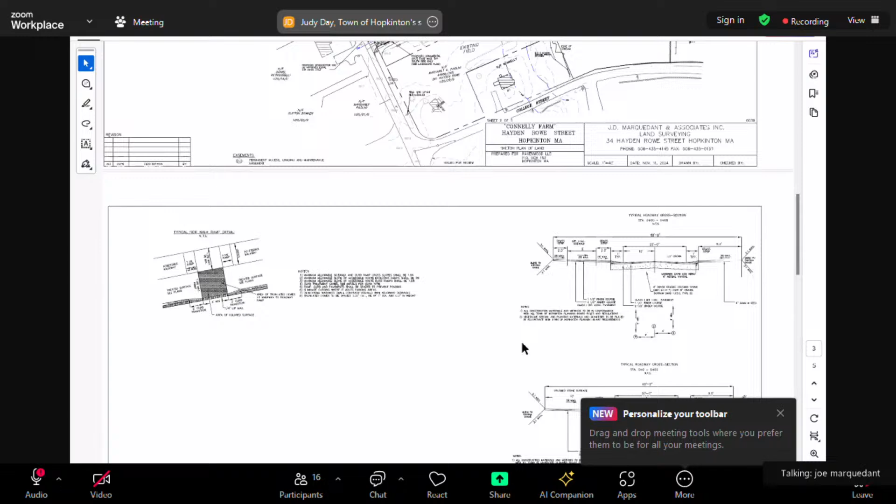So given that, what we have explored is a change in the location of this path. Do you mind scrolling down, Judy, to that one more page—two more pages, one more if you wouldn't mind. So what we are proposing now, Hayden Rowe is down to the bottom left, and we're about in the middle of the project.

That thick gray line that runs across the plan from southeast to northwest is the existing footpath used by bikers and hikers across the site. They have been using that continuously throughout construction. It leads from a parcel owned by the town off of Kimball Road down to the Dwinell Farm.

That is a better spot, quite frankly, for a path. The path through the existing field to other land of the town of Hopkinton down at the southeast corner also requires brush clearing, tree clearing, and construction of the trail. This existing path meets the Dwinell Farm in an area that is lawn and does not need any updates to the location. It links other potential properties like Connelly's, the Connelly Fields, Davenport Lane. It creates an awful lot of opportunities that may be better than the spot originally proposed, when the trail was at a different spot and, I guess, a different mindset.

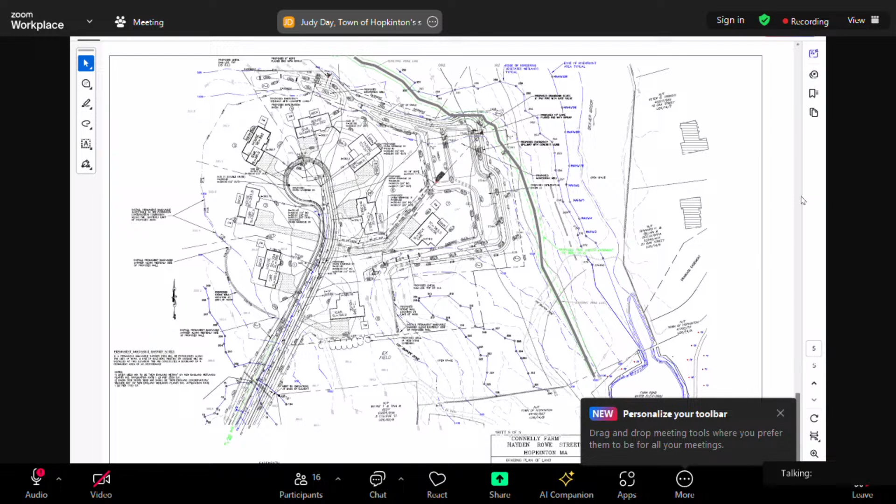Before we leave this topic, Judy, would you mind scrolling back up to the original page? Down one, I'm sorry. I should note that section that runs through the buffer zone was 10 foot wide on the original plan. You can see there that we're now in green with that location. We're going to be 5 foot wide, so there will be a change there. We will be reducing the width of the pavement through that section in the buffer zone. At some point when we get to the end of this, you'll be seeing a 5 foot wide walk through that location, not 10.

So since this is a request for a project change, I don't know if we have to, but it might make sense to vote, so you have formal support from the Commission. Also, I guess to document that walkway change on the plans, I don't think it would hurt. So unless anyone else has any questions, comments, or concerns on this plan, I'd look for a motion to approve the project change request and support the trail as shown in the existing location.

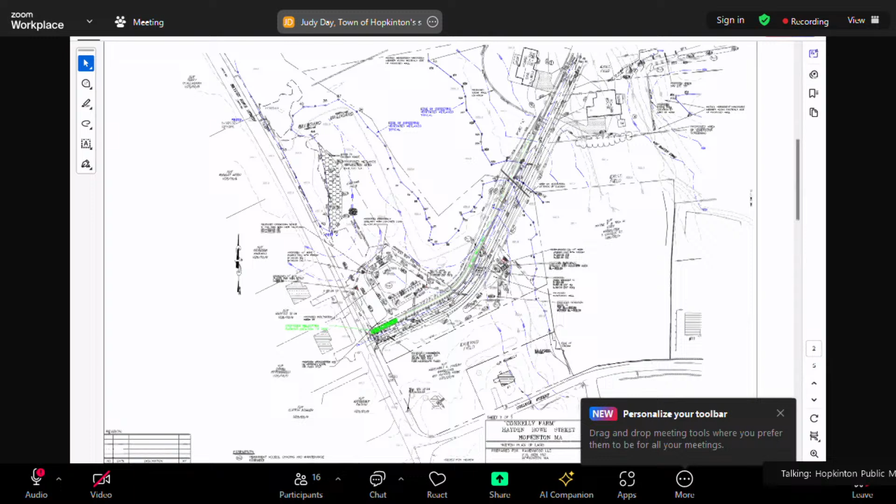All right, last but not least, 27 Jamie Lane, request for certificate of compliance.

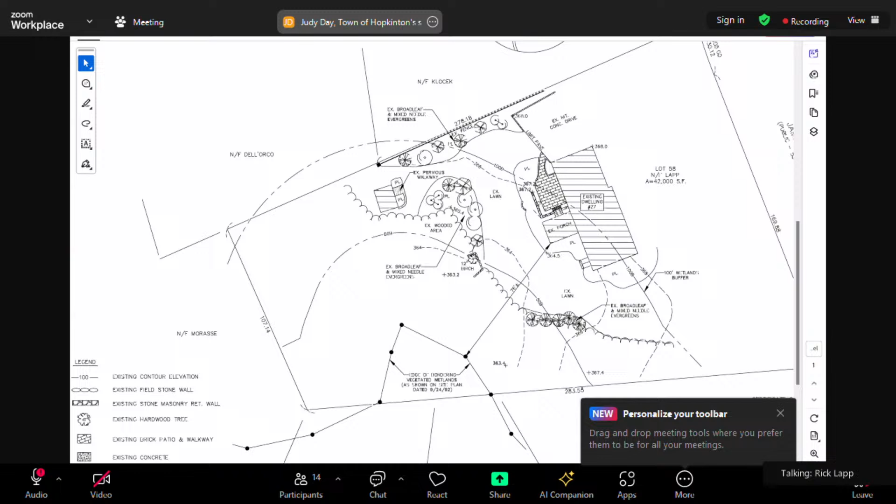Thanks for hanging in here with us, Mr. Lapp. Thank you very much for your time. Appreciate it. And have a happy holidays. You too.

All right, I think we don't have any public forum requests, right? No, through the chair, I think the only other thing I had on my list was also from the storm last Wednesday, the Hopkins School Addition project.

They notified Judy and myself that they were actively monitoring the site, and there was a small area near the existing detention basin where the water followed the erosion controls, dipped, and found a way underneath a walking path, and came out, with a little sediment getting into the basin. Judy and I looked at it on Friday. We thanked the applicant for notifying us of the problem, and they have installed additional erosion controls and will be actively monitoring it to ensure that doesn't happen again. So we do thank the applicant for self-reporting during that storm.

Oh, that's good. Definitely appreciate that. All right, anyone have anything else?

Just the motion to adjourn. All right, perfect. Can I get a second? Second. All in favor, Ed?